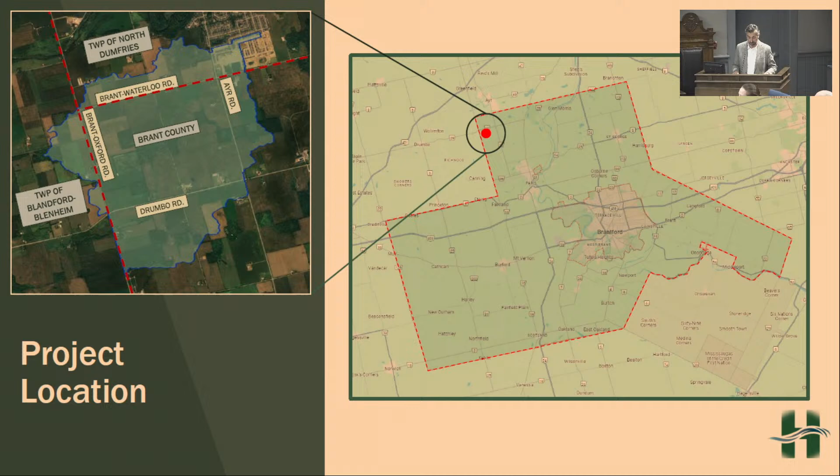A brief drainage system summary and the history of the drain. As we know right now, the Mitchell Municipal Drain consists of a main drain open, which is about 3 kilometers or 3,000 meters in length. It is an open ditch. There is a small closed section about 547 meters long that consists of a tile drain. Branch A is about 584 meters of a tile drainage system. Branch B is about 100 meters of tile drain. Branches C and D are both open ditches, branch C being about 1 kilometer long and branch D being about 1,175 meters long.

The drain was originally constructed under a report, as far as we know, dated July 10th, 1911. Main drain open, branch A and B, both those tile drains, were updated under a report dated July 18th, 1949. Main drain open, branches A, B, C, and D were upgraded, and new culverts were installed under a report dated October 1st, 1968. That's the report that probably generated the most work or authorized the most work on the system, on most of those components, where since then, not much has been done on the rest of the drainage system. Part of main drain open was closed in under a report dated September 26, 1979.

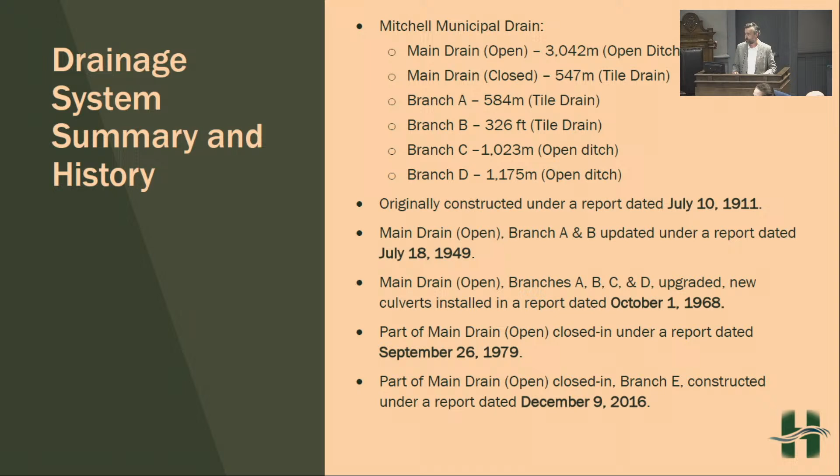That part would have been in North Dumfries. So there was a section of the drain that extended north into North Dumfries. That section was closed in 1979. And then on a report dated December 9th, 2016, there's a small section of main drain open that was closed in Brant County, just south of where the drain crossed into North Dumfries. And a branch E, which consists of an open ditch and a closed tile system, was constructed at that time. I believe the 1979 and 2016 reports were mostly authorized to service proposed subdivisions in North Dumfries or in Ayr.

Just going on to the public engagements, we held an on-site meeting on December 13th, 2022. Some of the highlights of that meeting,

were that the main drain, branches C and D, require complete cleanouts. Branch A needs upgrading as a tile drainage system and a better outlet into the main drain. I think at the time of that meeting, it was said that Branch A was outletting about 2 feet below the stream bed into main drain, so it had basically effectively no outlet at all.

Several culverts needed replacing or upgrading. Some new culverts needed to be designed and installed. There was maintenance done on the main drain upstream of Nith Road in 2016, but it's not known when main drain downstream of Nith Road was last maintained. And there was a dam holding back some water on the main drain that was to be removed under maintenance. That was as of the 2022 meeting.

We held an information meeting on May 1st, 2024, where we presented the proposed design, the estimated costs, and the proposed distribution of those costs. And that was on May 1st, 2024.

So through our investigation, our findings consist of kind of what I just reiterated. The main drain and both of those open branches require complete cleanouts. Several of the culverts needed replacing and upgrading. Maintenance done on the main drain was upstream of Nith Road in 2016.

Maintenance was done on main drain from Drumbo Road to where about that tile drain branch A enters in January 2023. And it's not known when the rest of main drain was last maintained, likely never was since it was constructed or upgraded in 1968. And that dam that I referred to earlier was removed in 2023 under maintenance.

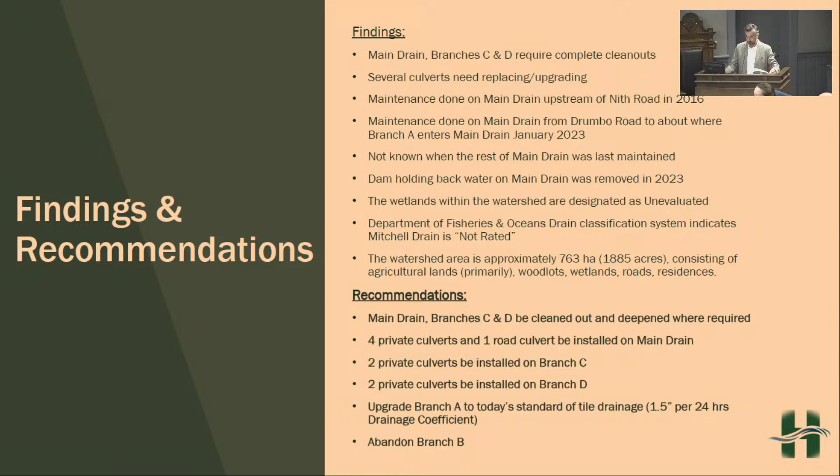This is just an overall watershed plan of the drainage area, and it highlights the drainage system itself. So that blue dashed line kind of in the main part of the area, that is the watershed area that I kind of highlighted earlier in the project location slide. Within that, the drainage system, you can see that the green wiggly line, that represents main drain open. That is an open ditch system that I said before is about 3 kilometers in length.

Branch A is a dashed line on kind of the west side. But in the middle of the page, that's the tile drainage system that we propose to upgrade, part of this report. Branch C is a purple line that kind of extends along Nith Road and turns toward northwest towards North Dumfries, sort of at the top of the page. That's an open ditch system. And branch D is the yellow highlighted line on the east side of the watershed that flows east from the main drain towards Ayr Road.

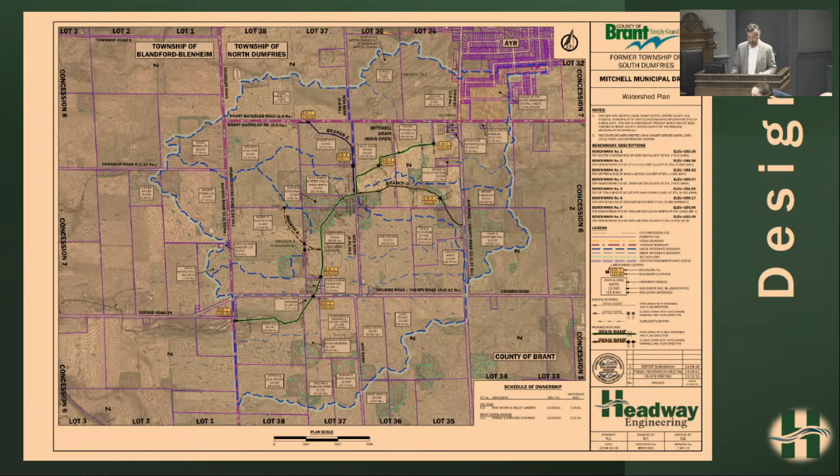So just jumping to the estimated project cost. The total estimated cost of this project is $812,000. What that consists of is the allowances, the construction costs, which include provisional items, our engineering fees for meeting correspondence, surveying, the design cost estimates, reporting this meeting, environmental consultations and approvals, the preparation of the contract documents, the administration, and our supervision and inspection of construction. And it also includes any contingencies, interests, and HST.

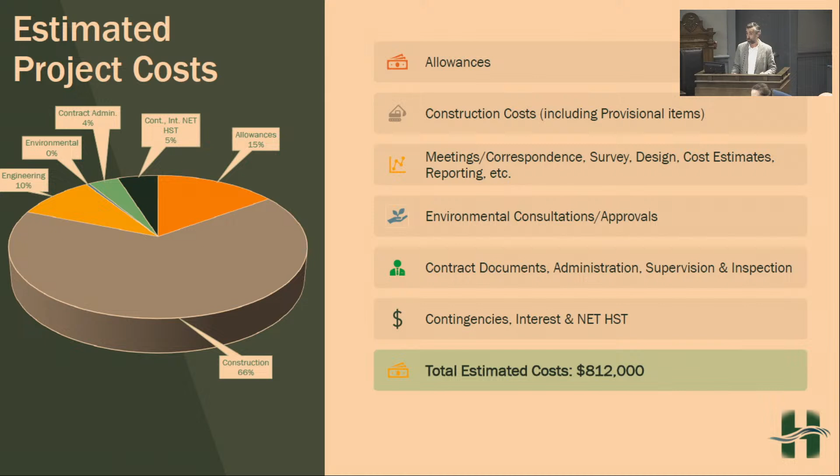The pie chart on the left shows kind of the breakdown of those items and their contribution to the overall cost, and the construction costs form basically 2/3 of the overall project at 66%. A little summary of the assessment of those costs in terms of land use.

Municipal lands are contributing approximately $126,000, or 15% of the cost towards this project. Private non-agricultural lands, basically built up residential and small severed lots, will contribute about $45,000, or 6% of the total cost. Private agricultural lands will contribute about $640,000 of the $812,000, forming roughly 80% of the overall costs.

Lastly, I have some photos showing items of work we're proposing. For example, a low-level crossing we're proposing as one of the culverts. It won't be a conventional round crossing; it'll be a low-level crossing on one of the bottom farms near the bottom of the main drain. That farm, based on the size of the ditch and the topography adjacent to it, wouldn't be able to handle a conventional round pipe, so we have to revert to a low-level crossing of this type.

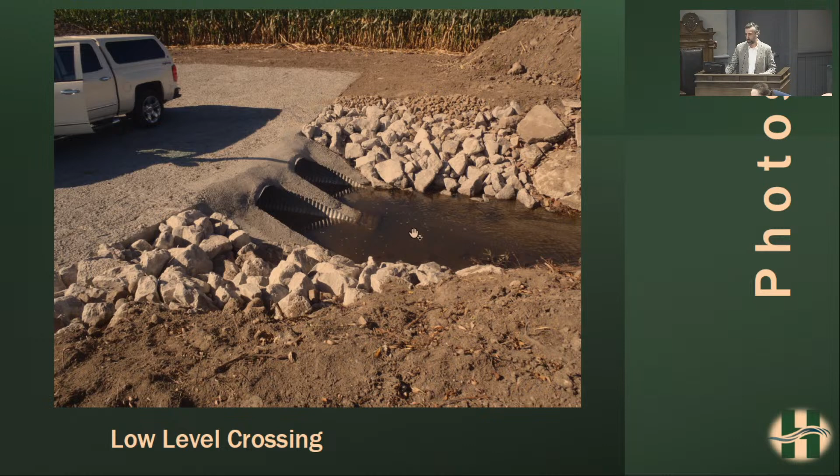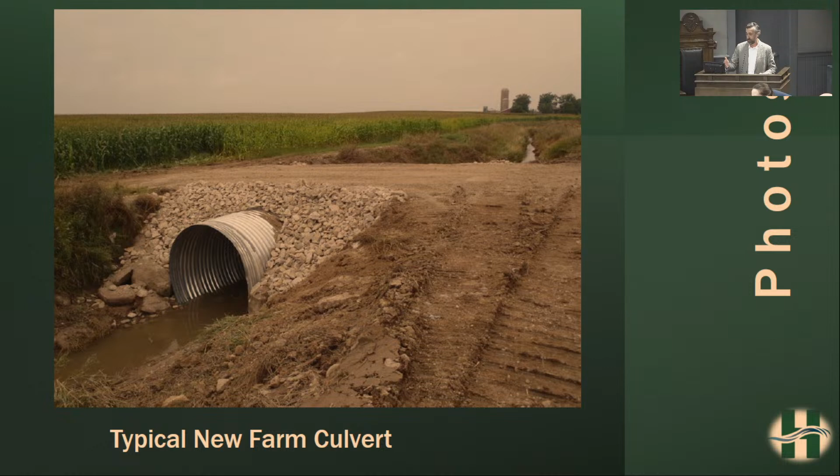This shows a completed low-level crossing with the concrete ramps and the two pipes going through the ditch. This is a typical new farm culvert we've installed. It's installed, but the seeding and vegetation hasn't caught yet, which would be the next step. It's basically complete with the riprap protection, and the laneway through it has been built up.

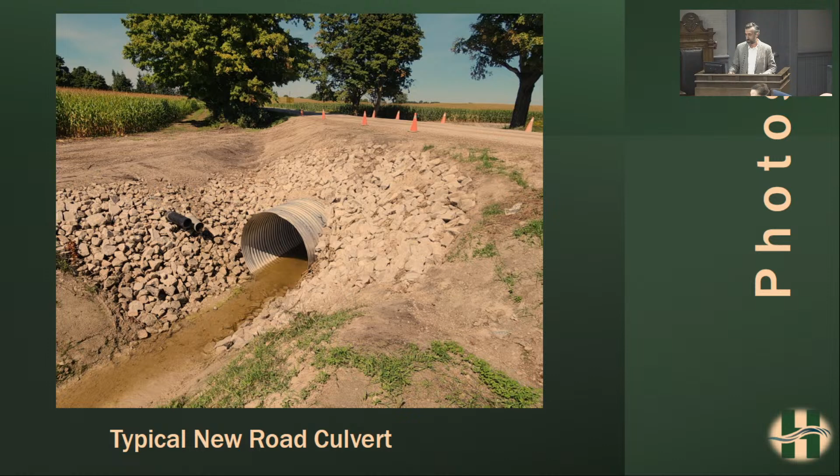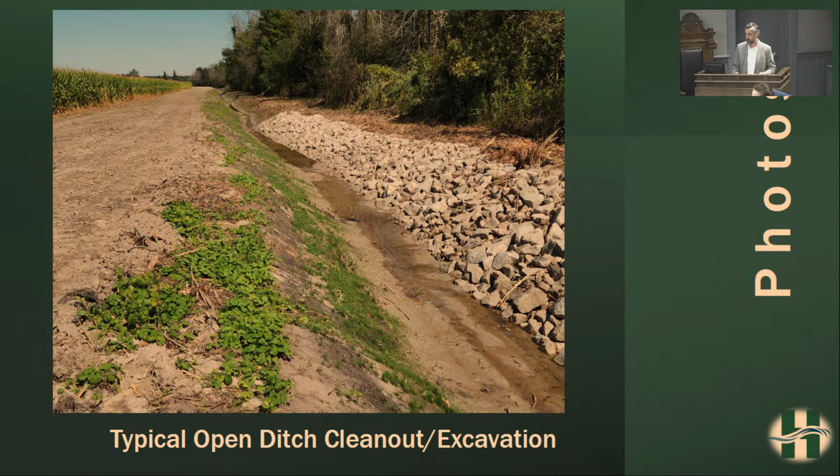This is a photo of a typical open ditch cleanout or excavation, where one side's been cleared, or one side consists of a working corridor, and a little bit of the other side's been cleared. You can see there is some riprap protection along the banks to help support them and maintain the structure of the ditch. We do have provisions in this project for bank protection, so as we go through it, if we identify areas that need erosion control and bank stabilization, we have provisions in the cost estimate to include that protection.

Lastly, the photos show typical tile drain installations relevant to Branch A, the tile drain system. The photo on the left shows a concrete tile drainage system being installed by means of a wheel trencher. The photo on the right shows a completed catch basin with riprap around it, which will also be part of Branch A. That dark soil in front is the working corridor after the farmer or landowner has had time to go over it, work it, and level it down, back to how it was before construction.

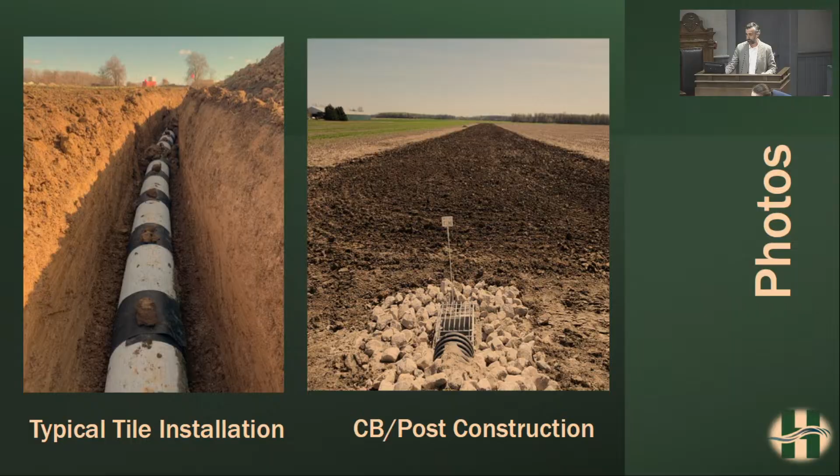That basically concludes my summary and presentation for the Minchin Municipal Drain, and I'd be happy to take any questions from anybody at this point.

Thank you. Does council have any questions of the delegation? Councillor Miller, you're first, and then Councillor Coleman.

Thank you, Mr. Mayor. A couple of questions for you, the engineer. Just a question on the culverts. Farm culverts have been designed using a minimum standard of a 5-year rainfall event. That's correct. But the road culvert for Nith was designed using a 10-year rainfall event.

Why the difference? There's usually a difference because the farm culverts are designed to a lesser standard, since the land around them can accommodate some of the additional surcharge - the banks will flood and the water will flow along the banks around the culverts. So they don't necessarily have to be designed to a higher standard to accommodate higher flows, whereas with roads, you'd rather have that water pass through the culvert than go over top of the road and possibly wash it out.

Given that this Nith Road is not a very high traffic or high volume road, but nevertheless it is a traveled road, the standard is a little bit lower than it would be for higher classified roads, but it's the next step up from a farm crossing. It's there to protect the road and prevent erosion or flooding during more frequent storms. Do you think, just a personal opinion, the standard is enough given what we've seen this summer?

That's a good, interesting question because standards have been changing over time. What we'd call a 5-year storm in the past might be a 2-year storm now, that sort of thing. So sticking with recommended standards satisfies that need, but there's that question of always maybe wanting to look at how standards are changing to accommodate the changing climate we're experiencing. I don't think we should over-engineer everything, but that's just my opinion.